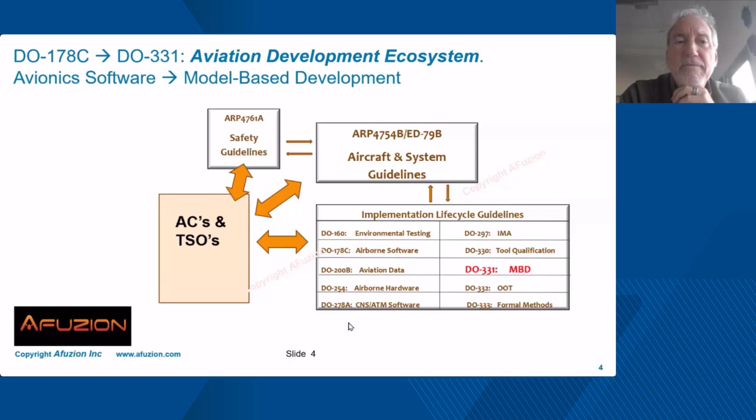On slide 5, the next slide, we'll take a look at the old versus new. Now, many of you might be like the guy on the left, buried in paperwork, right? Well, today, modeling, the tools that we have, including from MathWorks here, no need for that anymore. We embody within the tools the model, the requirements, the interface definitions. We can define the architecture. We can iterate and animate. Define the system functionality, all the external I/O.

We can do trade-off analysis, create traceability, test specifications, and truly, with a push of a button, we can code, okay? But you need a model first. Humans make the models. The tools are very powerful for us. The new approach truly is modeling.

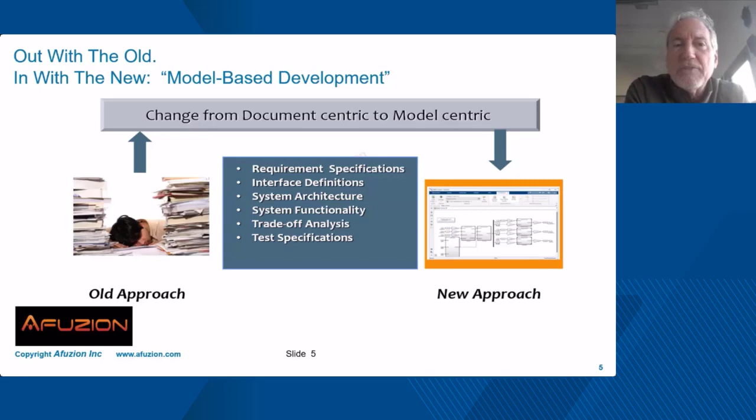All of your schedules are getting faster. Your budgets are tight. Your managers want new product quickly. Modeling is the key to that. On slide 6, the next slide, we'll take a look at what we actually need. But remember the development approach.

System engineers, perhaps many of you architects, we model before the code and then use that model to generate the code. So models need a formal language, okay? Mathematical closure represents all the I/O. Simulink is a type of formal language that lets us do that, okay? Now, think of models as code was to the old days when my hair wasn't gray, okay? We wrote in assembly language, right?

We are getting further from the hardware, so a common practice, remember in DO, in cars, medical devices, nuclear, you might be Einstein, but we don't want you to prove you are Einstein. You take refinements, steps. So first we have either high-level requirements then low in the old days. But today with modeling, it's a spec model, specification model, the external I/O, the system functionality.

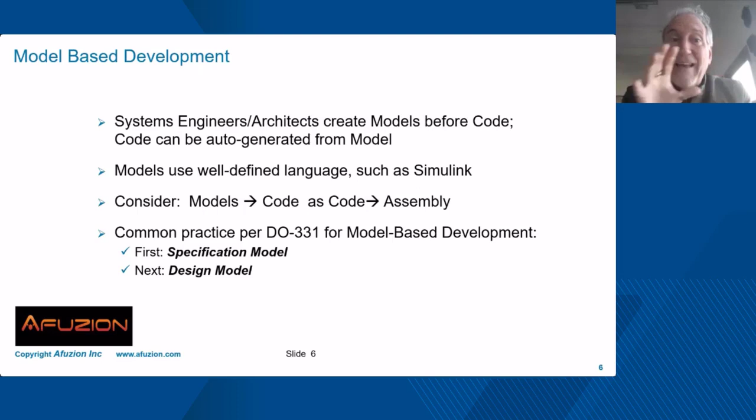We refine, iterate that within the tool, Simulink. And then we create the design model. And Bill's going to show you how to do that. But it's a two-step approach with evidence. On the next slide, slide 7, you have some interesting considerations. Many advantages to model-based development.

Instead of different languages between system engineers, English, French, German, Italian, British, that foreign language, well, engineers using code, C, C++, we use a common language. This reduces the number one cause of errors, which is assumptions. So we can also animate, execute in a simulated environment the actual requirements. We have much better reusability and platform flexibility.

And remember in certification, half of the costs are in certification. But if you don't change the plans, the requirements, the design, if it's truly reusable, all you do is retest, review the test. Those are automated, recertified, okay? So reusability is the key, and modeling gives us that. So we can really respond quickly to requirements changes. And again, that's the sound of automated code generation.

Now, slide 8 has a couple additional advantages, okay? The modeling really lets us manage complex system development. We can separate concerns, domains, and develop incrementally. Have you heard of Agile? Well, safe Agile really does work. Better communication, design quality. Okay, you've all seen projects with months or years of integration.

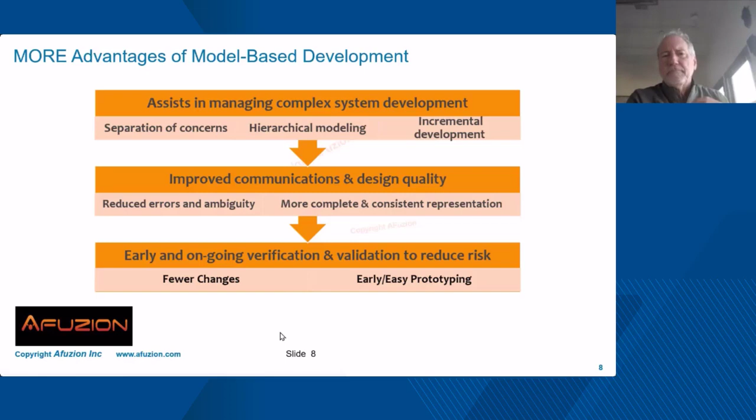Not necessary. If you're building a railroad to meet in the middle, start in the middle and work out instead. Less assumptions. So you can have better risk reduction, verification, validation, requirements are correct. That means you get less changes, fast integration, and you can prototype, again, using Agile. Okay, slide 9. The next slide gives us a little picture of what we need, okay?

Now, we love modeling, but remember, we don't always love the engineers that model. Who do we trust in safety critical? No one. Engineers make the model, and that means we need modern tools. You got it. Bill's going to show you in 45 seconds here, I promise. Well, those tools need to follow a standard. So John and Mary, when they create their model, we cannot tell if John did it or Mary. They use a standard. We use that standard to evaluate the model.

Models must have requirements. Did the model satisfy the requirements? Models are going to have configuration items. That makes them portable, reusable, actually useful. We're going to use element libraries and define the system interfaces. And all these have to be in writing, but the tools help us, okay? We're going to use a configuration index. So through the life of

that product, right? I'm holding up my Apple iPhone here. Yeah, they change every 6 to 12 months, right? Well, can Apple replicate the new version from the old version? What's that configuration? Can we trace it? The modeling tools really help.

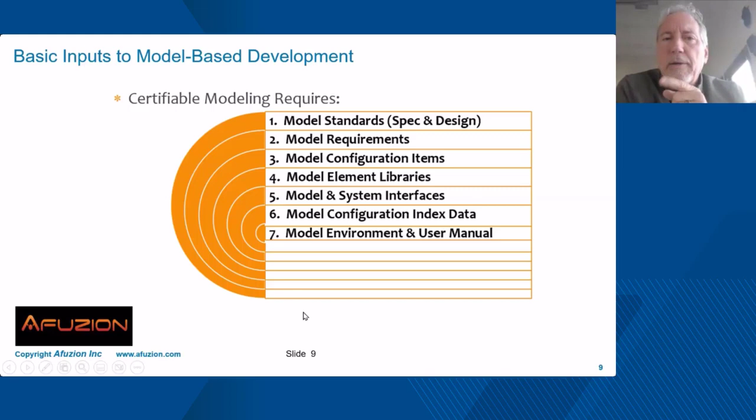And then finally, what's the environment that we build the model from? The versions, the tools, the libraries, a user manual so someone 30 years later, through the life of an aircraft in that case, can replicate that. So DO-331 is a terrific read. It talks about safe modeling. It's applicable to automotive, space, industrial control. Let's go ahead now and look at an actual example from Mr. Potter, okay? Bill, go ahead and take it over right here on this slide.

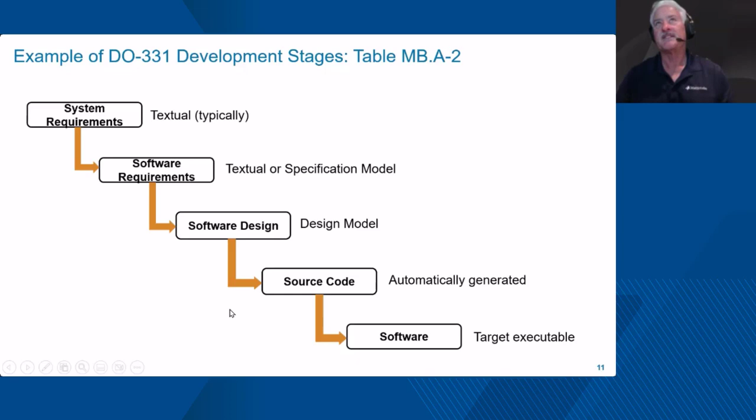Now, on the verification side, if you look at the software, it has to be tested, and you have to do some coverage analysis. So this is covered by tables A-6 and A-7 in DO-178 and DO-331. For your source code, you typically have to do reviews and analyses of your source code. That's table A-5. For your design, which in this case is in models, you can use review, analysis, and simulation.

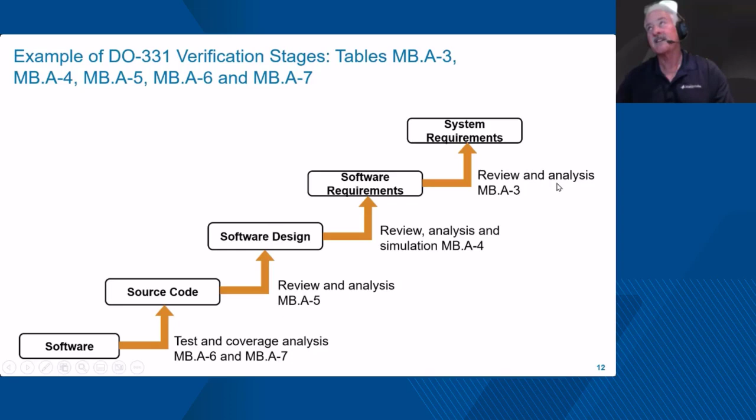Simulation is an activity that's enabled by model-based design, and you can get credit for simulation for some of your verification activities, thus reducing the amount of reviews and analysis you would have to do on models. And then for your software requirements, typically that's also a review and analysis activity. Could be slightly different based on whether those requirements are textual or done by specification models.

So now let's look at the first tool here from MathWorks. We're going to be talking about the Requirements Toolbox and how you might use that to do textual requirements. So with our tools, we have the Requirements Toolbox, and this toolbox has an editor in it and allows you to write and configure textual requirements.

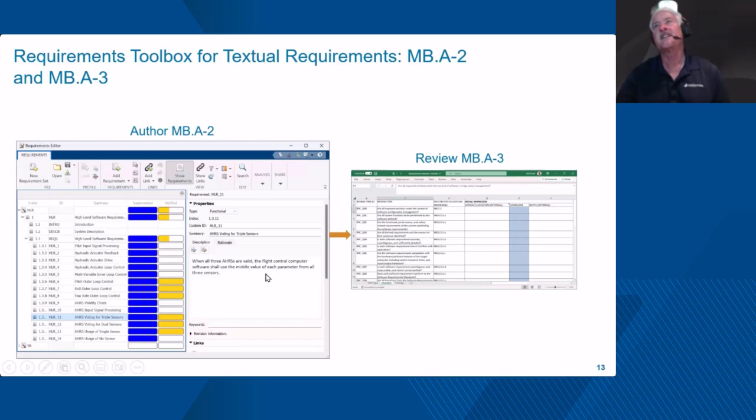And then from these textual requirements, you can link them up to system requirements, you can link them down to models, you can link them down to test cases. So it gives you the ability to do your traceability that's required, as well as authoring your requirements. Now, if you do these requirements textually, you typically have to review them for consistency, completeness, correctness.

And so one of the things we do, we ship within our DO qualification kit some templates that have some review checklists that you can fill out and do a review. And then finally, you will archive that review checklist as part of your certification evidence. We can also generate a report in the form of a document of the requirements from the Requirements Toolbox. This is also something then that you can archive away as part of your design data, and we qualify the generation of those reports.

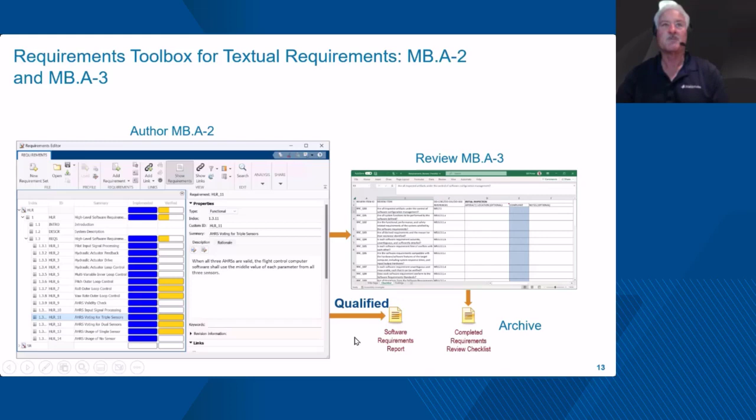So an alternative to that is to use a Requirements Table block for a specification model. Again, this is an alternative. It's a way of using spec models instead of textual requirements for your high-level requirements. We have this Simulink block that comes with the Requirements Toolbox called a Requirements Table.

And in that table, you can put in some preconditions, some actions. So basically, you can define for this set of inputs, my system is supposed to take this action. So it's a specification telling you what you should do, not how you should do it.

And we can actually generate a report from this specification model, again, a design description report, and that generation of that report is qualified. So you can have this specification in the form of a document that you can archive off. People can look at that without having actually a MATLAB or Simulink license.

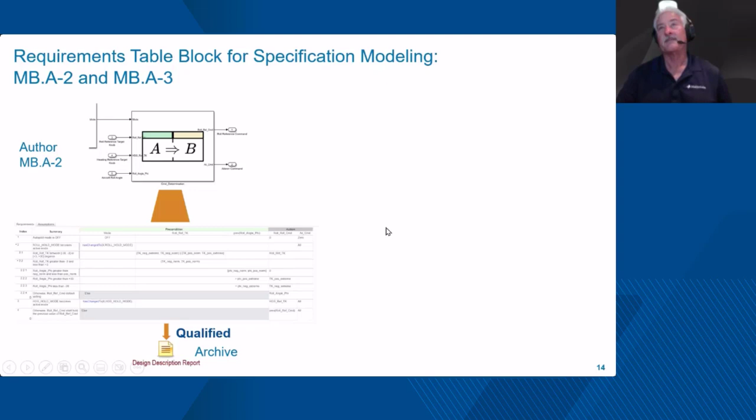One of the advantages of having the specification in the form of a model is that you can do some analysis on it. So for example, with Simulink Design Verifier, we can find inconsistencies and incompleteness in the requirements automatically using a tool. So it can find things where maybe I have a missing requirement or maybe I have conflicts in my requirements. So we can automate that activity, which is an advantage over textual requirements.

But even then, you still have to do some manual review because you're going to have to verify that your requirements are correct. The tool can't do that. So there's still going to be a review activity you do with a checklist, and then you can archive that requirements review checklist as well.

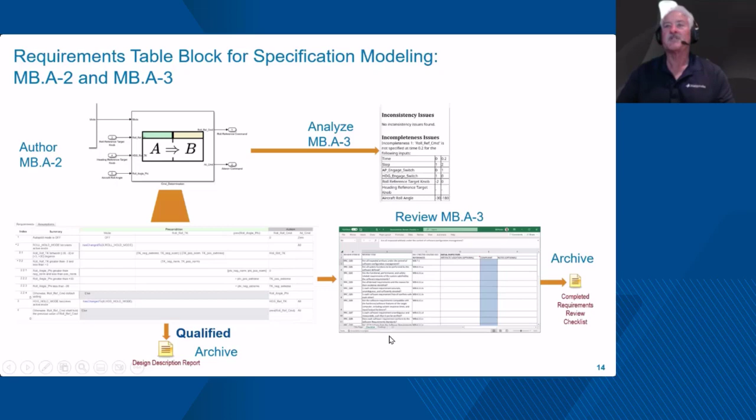Now, moving on to the software design, this is where Simulink comes into play. I can create a model in Simulink, do my design in Simulink, and I can trace that Simulink model up to the requirements. And it doesn't matter whether the requirements are textual or a specification model. Either way, I can link up and trace my design back to my requirements using our tools.

Also, we can generate a design description report for models that completely documents the model, again, in the form of a document, maybe a Word document or PDF, that you can archive off your design. And again, that gives you the advantage. Someone can audit that design without needing a Simulink license.

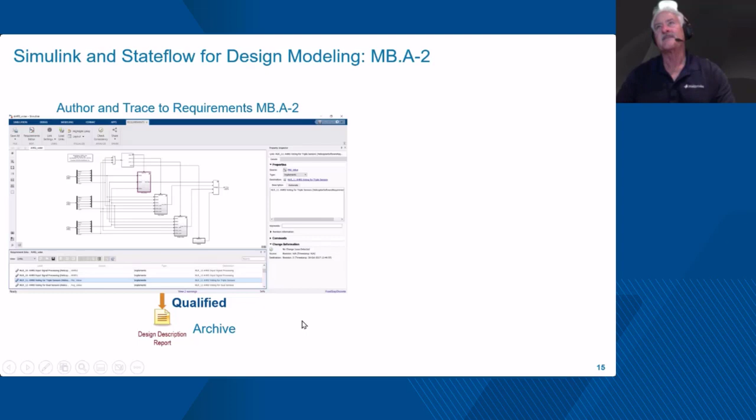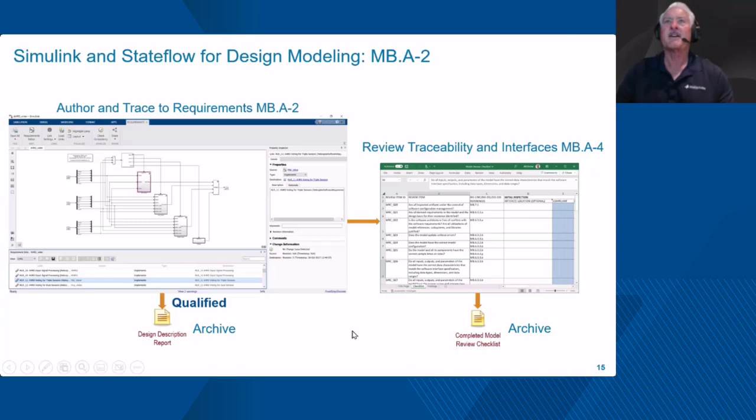Now, in order to verify the traceability of the model, that it's correct, a human does that traceability, so you still have to do some manual review of the models. For example, the traceability review and the interfaces that are going to go to your other software components. Those are things that you cannot automate verification for, so there are some manual review activities, but as I stated earlier, we're going to use simulation and automated analysis to do a lot of the verification on the model. Again, you would archive your completed review checklist for the models to have that artifact for your certification evidence.

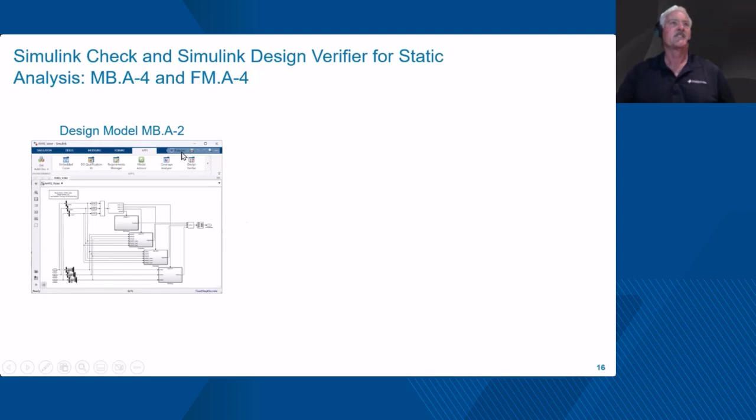Now I'm going to talk about two other tools, Simulink Check and Simulink Design Verifier, for doing static analysis on the model. And basically, you're going to start again with your design model. We have a couple of apps here from the model. The first being Simulink Check, which has the Model Advisor functionality. You can see here, this is a qualified tool, and it checks conformance to standards. It automates this process. We ship modeling standards with Simulink, and this tool automatically checks the model against those. So you don't need to manually review that the model conforms to standards. That process is automated. And of course, you then archive off that standards report.

Now, a second tool we have is Simulink Design Verifier. This checks accuracy and consistency. It actually uses formal methods. We did mention formal methods earlier. We do have formal methods tools at the model level and at the code level. This tool is qualified. This will find things like potential runtime errors. It could find dead logic in your model, things that would lead to unreachable code. It could find numeric overflows, out of bounds arrays, things like that. Again, this is a qualified tool. The design error report you get can be archived off as part of your cert evidence.

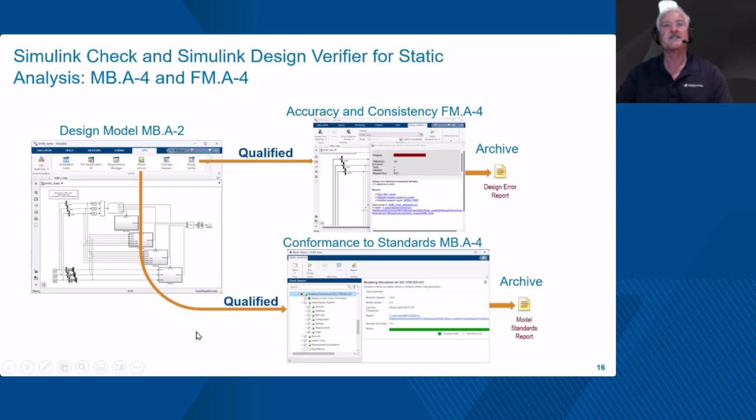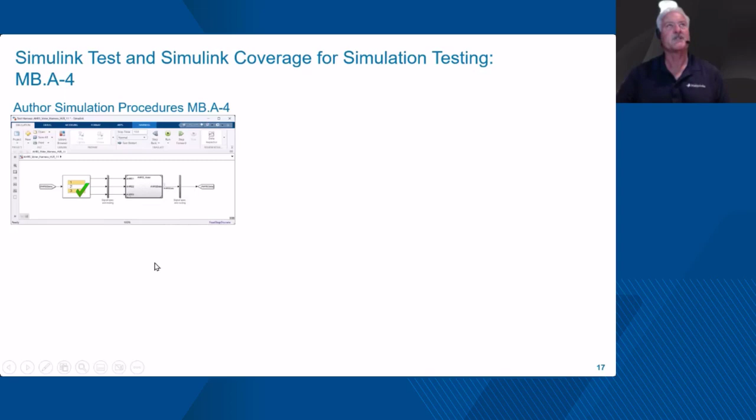Then we move on to the primary method for checking models, and that is using simulation. So for this activity, we have Simulink Test and we have Simulink Coverage. So you can author simulation procedures. Part of that authoring can be done in test harnesses. This happens to be a test harness for a model. It's using the Test Sequence block. You can also automate execution of the test cases and reporting using the Simulink Test Manager. This Test Manager works in conjunction with test harnesses to be able to verify models and generate reports from those.

And also, you can then review the test cases and procedures. Because these test cases and procedures are authored by the human, you still have to verify that those test procedures and cases are correct. So you use a review checklist for that, and that completed review checklist is used as your cert evidence.

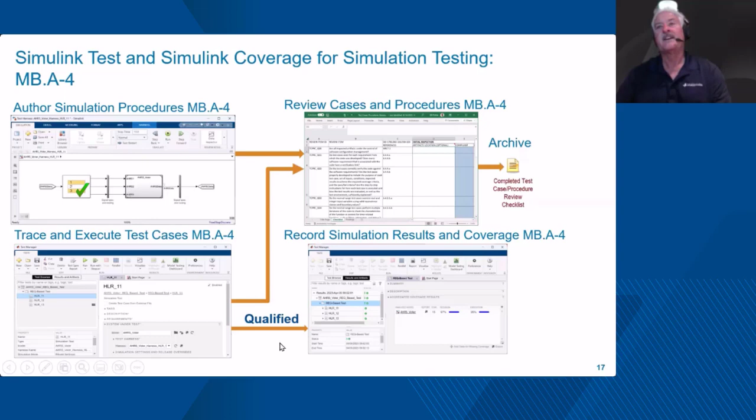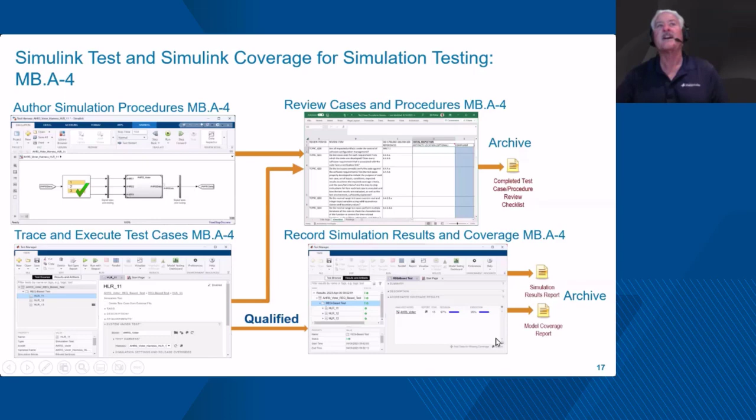Now, when you run the simulation, it also records model coverage, and executing the test cases, checking the pass-fail, and producing the coverage results, those things are qualified. So we have qualified tools for doing that activity, and then that provides you a simulation results report and a model coverage report that you can archive off as your evidence that your simulation cases passed.

Now, for source code, we've talked about this numerous times here about being able to automatically generate the code. So Embedded Coder is used. It can generate C or C++ code. It's very well commented. It's traceable up to the design model. We have comments in the code that trace it up to the design model. It's very readable. It's customizable as far as interfaces and parameter names and things like that.

So this comes directly from the model. This process is automated, so you don't have to write manual code. And of course, you end up with your source code, which goes into your source control system as your artifact for source code.

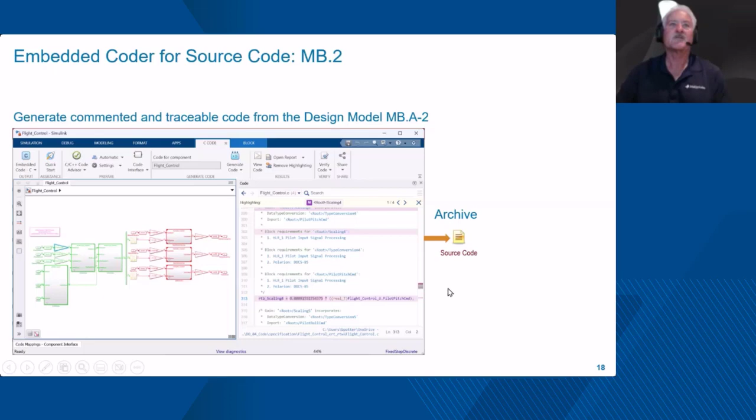Now, for verification of the code, we actually use Simulink Code Inspector and Polyspace Bug Finder for doing source code verification. So rather than having a qualified code generator, we actually use verification tools to verify the code from models. This activity covers compliance to the requirements, traceability, accuracy, consistency, verifiability. These are all things that Simulink Code Inspector is actually qualified for verification.

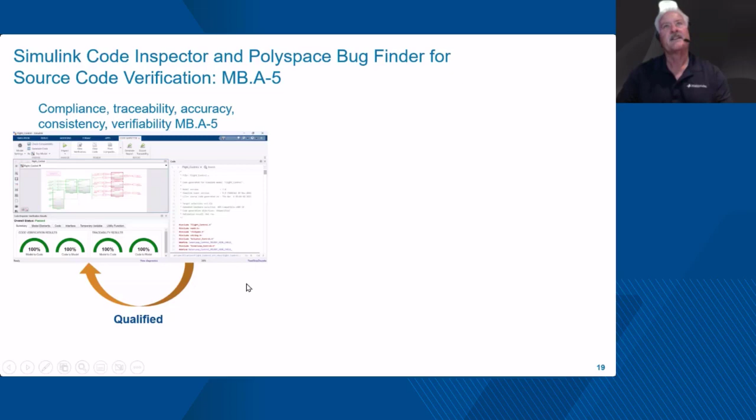So it does a comparison between the model and the generated code and verifies the correctness of that. And we get a code inspection report out of that. That's your artifact that shows you comply with table A5.

Then for conformance to standards, we have Polyspace Bug Finder. Again, this is a qualified tool. We support MISRA coding standards, and so the tool verifies the conformance to the MISRA coding standards. This is very much like the Model Advisor checks for the model. You have model standards. We automatically can check the conformance to those standards, and here we have generated code, and we can automate conformance to standard checks here with Bug Finder. And again, now you get a code standards report out of here.

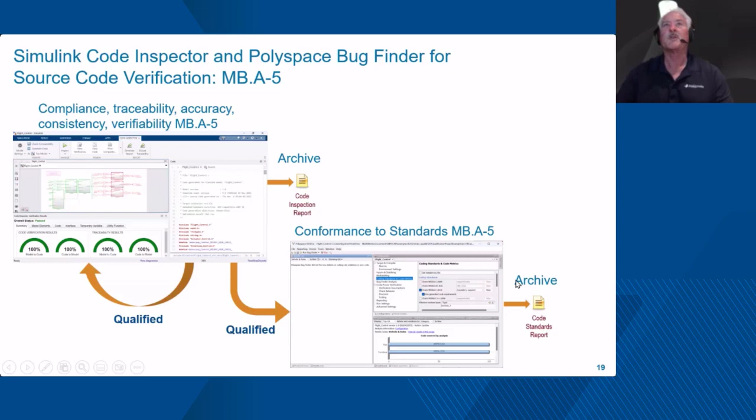Then we have Polyspace Code Prover. Now, Code Prover is also a formal methods tool, just like Simulink Design Verifier, and it can do checks for robustness of the generated code. It can also do data flow analysis on the code. So this covers tables A5, A6, and A7.

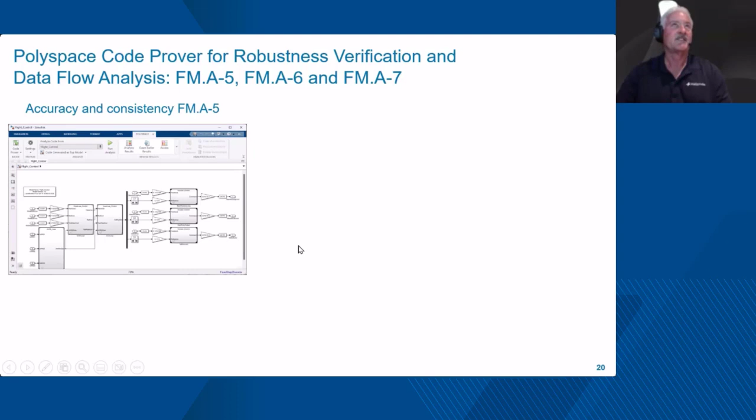So for accuracy and consistency from the model, we generate the code, and we have the Polyspace app here that will look at the generated code, and it's qualified as a formal methods tool, and it can show that the object code is robust, so you can actually eliminate some of your traditional robustness testing by using formal methods instead. And it also will generate a data coupling report, which will show any coupling issues between global variables, for example, that you pass through your software architecture. So it's able to do some data flow analysis as well as some robustness checks on the code.

And again, you get 2 reports out of this. You get a runtime error report, so it could tell you, do I have divide by zeros? Do I have overflows? If your code is good, you'll have green. If your code has a bug, it will turn out red. If you have dead code, it will come out gray. If it's orange, it means you may still have to run a test for that particular case.

And the shared variables report will tell you things like if you have a read before write, if you have uninitialized variables, if you have any kind of conflicts between different processes in your software. So it's able to detect those type of errors as well.

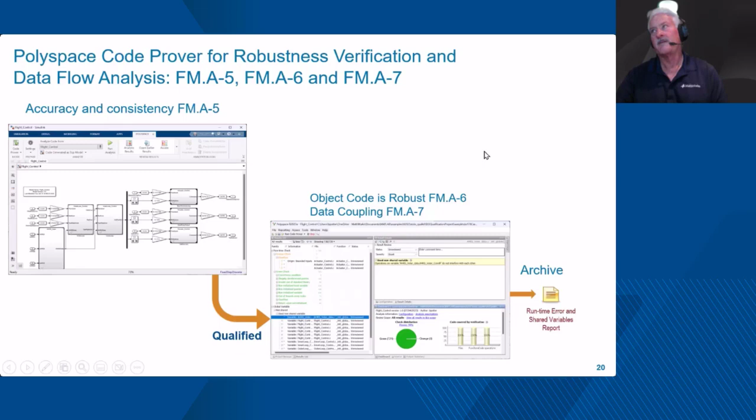Then the next step that we're going to go to is testing the actual object code and doing structural coverage analysis on the source code. So Simulink Test and Simulink Coverage we saw previously could be used to execute simulation cases. Now we can take that same test harness that we ran simulation cases on, and in fact the very same simulation cases, reuse them to test code.

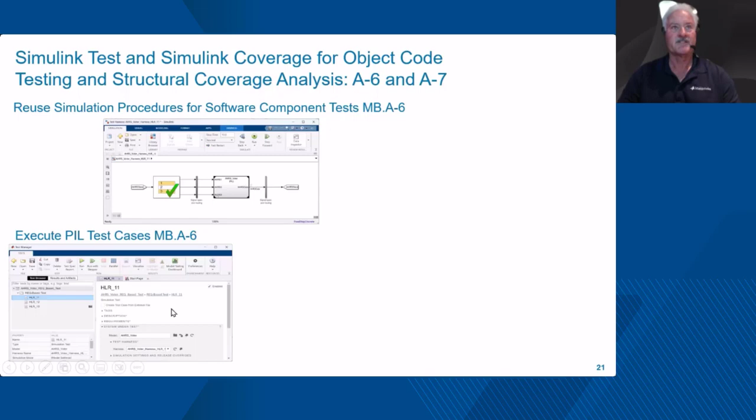And you can use the test manager to run this test in PIL mode. This does your Table A-6 verification of the executable. It also instruments the code for structural coverage, so you will get code coverage in conjunction with the actual pass-fail test results. Both these tools, Simulink Test and Simulink Coverage, are qualified for doing the pass-fail checking and for doing the coverage analysis on the source code. And so you will get out a test report as well as a code coverage report from the tools that you can archive off.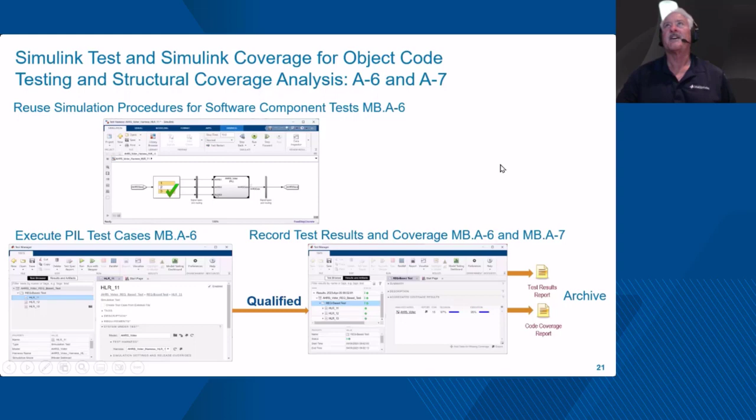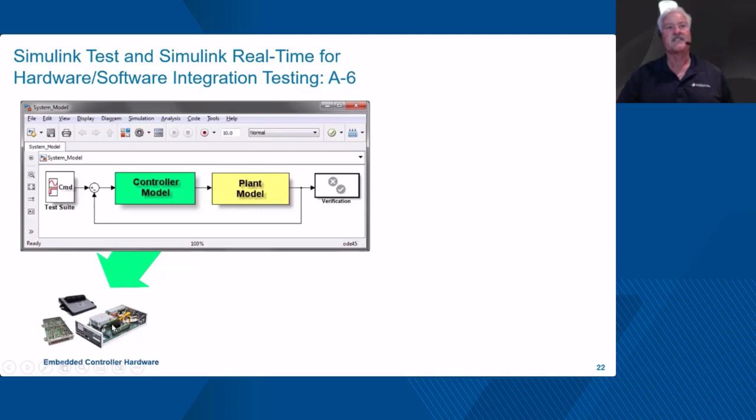So you're going to generate code from your controller model that may consist of many, many models, and a lot of code gets loaded onto an embedded target, and you're going to actually want to test that target with all its device drivers, its operating system, everything running in a lab. One of the other things we can do with Simulink and our code generation technology is if we have a plant model in Simulink, we can actually generate code for that plant model, load it onto some Speedgoat hardware, which also has hardware boards with bus interfaces, analog interfaces, any kind of I/O you'd like to configure, and we can run that plant model in a simulation environment in a lab.

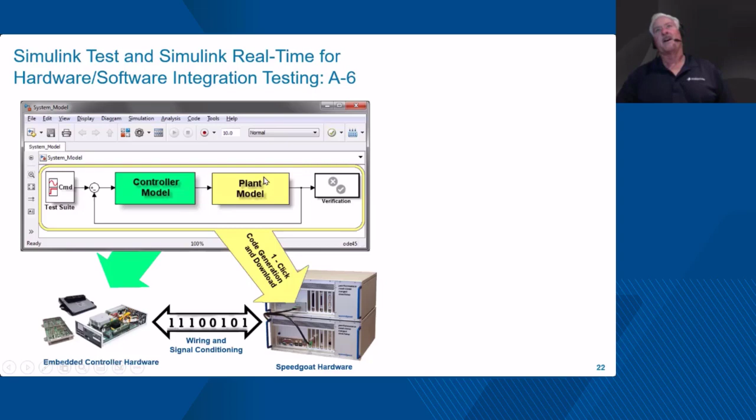And then we connect these two together through wiring, signal conditioning, and we're running our real box in the lab with a plant model to be able to do a system level or a hardware-software integration level test. And the nice thing about this is we can actually connect Simulink Test to the Speedgoat hardware and actually record the test results and verify the pass-fail checking just like we did for models, just like we did for PIL mode. Now, these tests will be slightly different than the test cases for PIL mode or models because we're actually stimulating real hardware here. So it's at a higher abstraction level of test in this case, but we can still use the qualified tool to do this. And then we'll get a test results report, again, that you can archive off as your cert evidence.

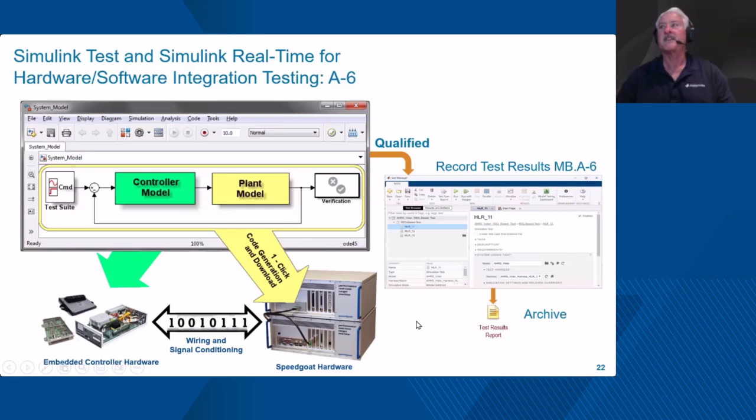One other tool I didn't mention specifically on any slides was the Simulink Model Compare tool. So we do have a tool that can do model comparisons between two different versions in your CM system. We also qualify that differencing tool because models are fairly complex. It's not a simple text comparison like you would have for documents or code. So we do qualify that tool as well as part of our tool qualification.

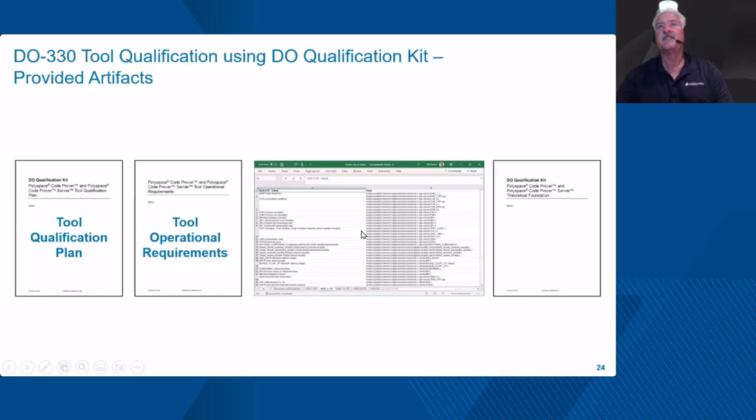What are the artifacts that come with the kit? Basically, the artifacts that come with the kit are those called out by DO-330. So we provide for each tool a tool qualification plan, this document, and then we provide a tool operational requirements document. Those are all required. We have test cases and expected results and procedures that you can run in your installed environment. One of the requirements for tool qual is you have to execute the tool qualification tests in your installed environment. That's one of the mandatory things called out in DO-330. So we provide the test cases, procedures, and the automation to run those.

And then for formal methods tools, such as Polyspace Code Prover here, or Simulink Design Verifier, we also provide formal methods justification, which basically documents that the formal method is sound and you can justify its use. This is a requirement from DO-333 that you have to do this for tool qualification.

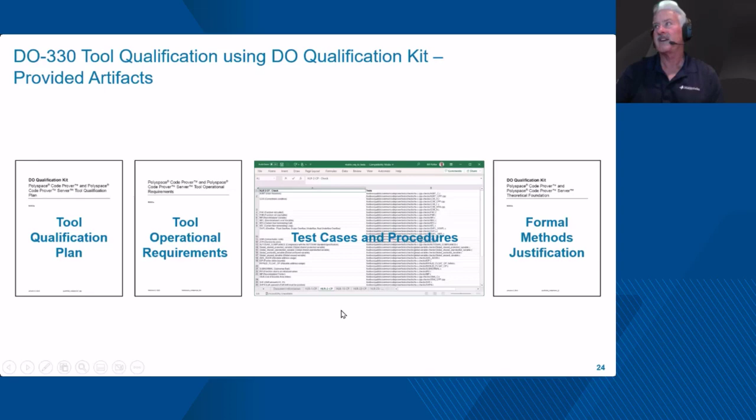Our next poll question, we'd like to know, do you need to comply with the security standard DO-326? Looking for input on this and see how many of our customers have to go through this.

So now I'm going to hand it back to Vance to do the conclusion here. I think you're on mute, Vance. Terrific. Thanks, Bill. Sure. A little early here in Los Angeles. I needed that fourth cup of coffee, right? Right. That was a terrific walkthrough, a fast-paced topic.

Model-based development, tool qualification. So to conclude, let's remember that truly model-based development is real. So many aircraft, probably half of the projects, 30 in a given year that we work on at AFuzion are using model-based development. That's really up from just a few years ago. The productivity, the efficiency, and most importantly, are you really making software and systems that are meant to be used one time? I mean, no, you're not.

Look at this iPhone, right? More processing power than the entire Apollo moon program. Well, it's about reusability. Apple's not reinventing. Samsung, right? Huawei, they're not reinventing everything. You should not be either.